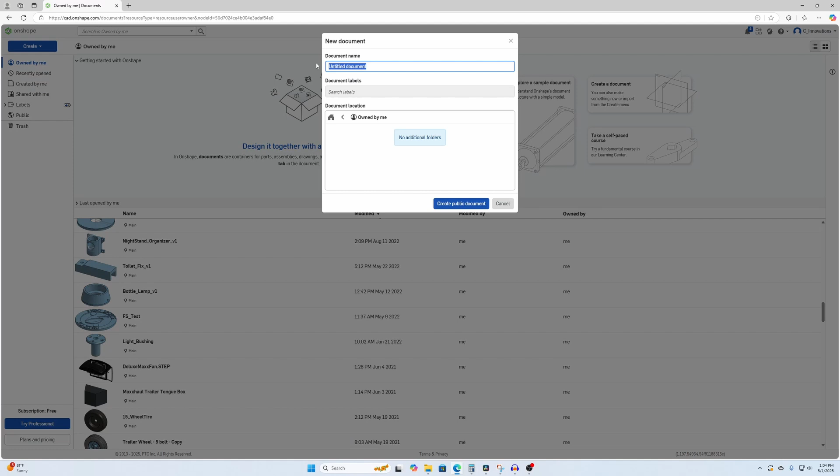So let's open up Onshape, go to Create, Document, and call it Custom Keychain. Open that up, jump right into it, hit Sketch. We'll select that top plane for our sketch plane and orient it vertically like that.

First step, draw a rectangle. Hit the D button for dimension. Let's make that 2 inches by 3/4 of an inch.

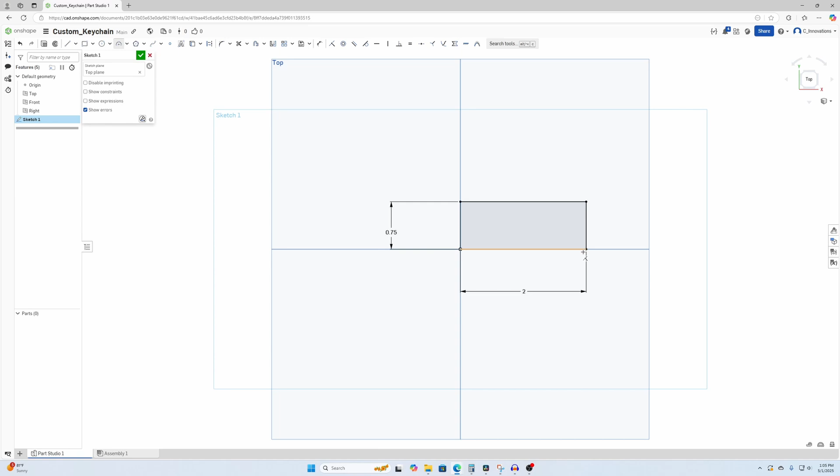Let's go ahead and add an arc to the end of that. Pull it out, make sure that snaps as such. And we're going to hit the trim command to get rid of those lines there.

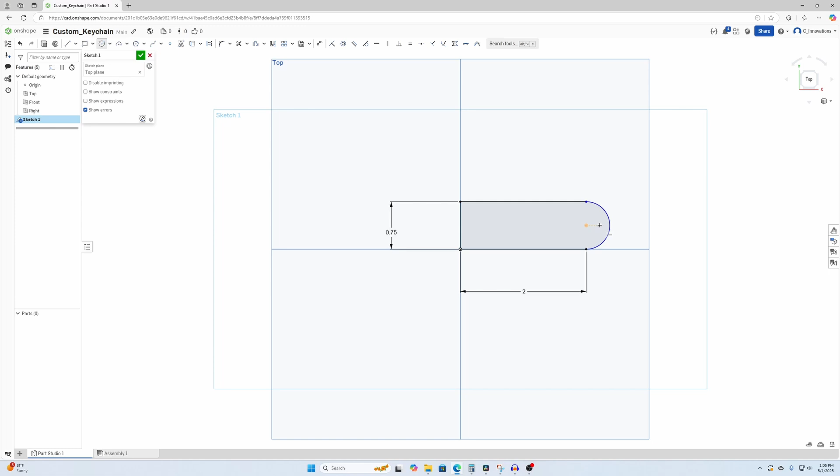Now I do want to add a hole for the actual keychain, so I want to hover over the center of that radius, and I just drag my mouse that way, and it keeps it in line with that. Let's make that about 3/16 of an inch diameter, and about the same from the center there.

Okay, finish that sketch, hit extrude, select sketch number 1. Let's do 1/8 of an inch, 0.125.

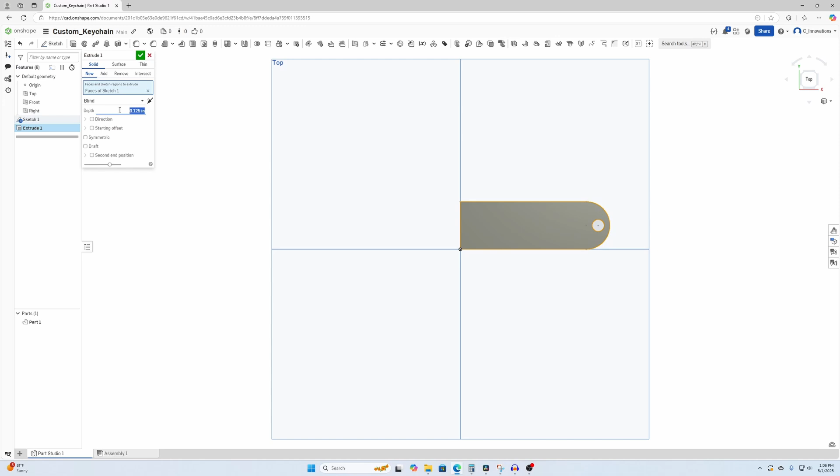Let's go ahead and add some text. We hit sketch again, select that surface, go up to our text command, and we're just going to drag a box right there. Let's call it Key Number 1.

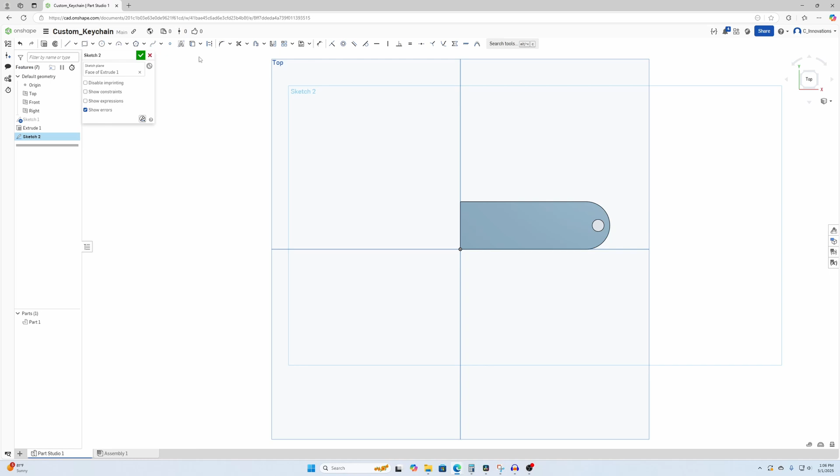Okay, that's a little big, so we're going to hit the D button for dimension. We're going to select the bottom of that sketch box, and we're just going to make that 1.5.

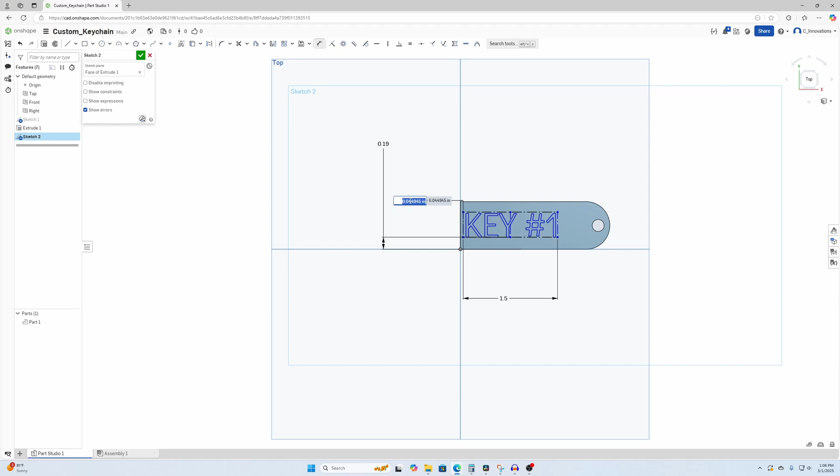Okay, and we're going to dimension from the bottom of that to the bottom of the keychain. Let's do 0.19 from the back of the keychain. There we go. You could write any text you want in there, and size it however you want, and it comes out pretty good.

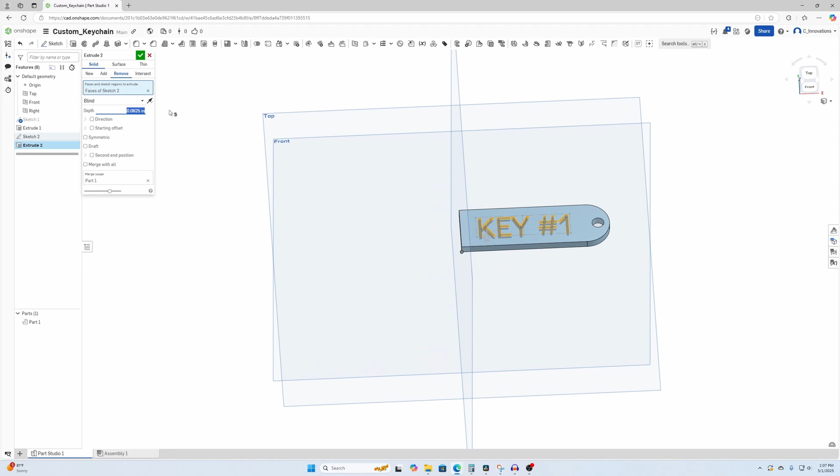So select that sketch, hit extrude command again, select sketch number 2. This time we're going to hit remove, and we're just going to do half of that thickness, 0.0625. You could also extrude it outward if you wanted to, easily enough, but I like to emboss it in. Go ahead and hit that, and there we go.

Custom keychain done pretty quick.